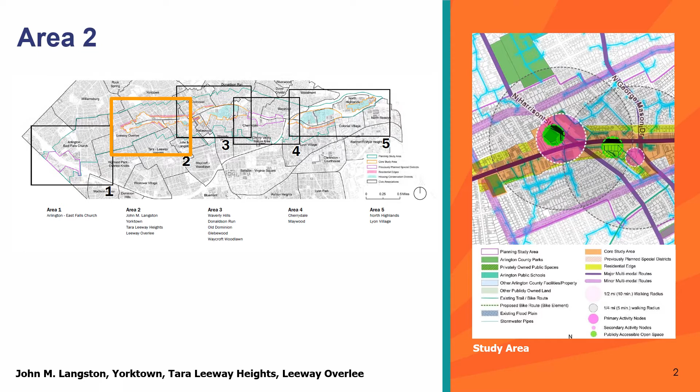Area 2 is in the western portion of the Plan Lee Highway corridor and extends roughly from Lexington Street in the west to the Langston Brown Community Center in the east.

Through our engagement with the community so far, a number of shared aspirations have been voiced regarding this portion of the Plan Lee Highway corridor.

Relative to land use, economic vitality, and housing, there's been a desire for more businesses and mixed use on the four corners of Lee Highway and North Harrison Street, along Lee Highway and on North George Mason Drive.

Density and taller buildings in these areas seem appropriate, but mid-rise, not high-rise, and only if the parking is addressed, preferably underground or within the buildings, if transit access improved, and stormwater runoff is accounted for and mitigated or reduced.

An appropriate transition in scale, height, and character are achieved, and we want to use open spaces and gradual height transitions to make that happen.

Improving the aesthetics and function of the commercial highway frontage is important as well. And there's concern over losing the Lee Center because of its services and its easy accessibility by foot.

Regarding public spaces, transportation, and urban design, there's an acknowledgement that people will still drive cars in the future, certainly in the foreseeable future, and that we'll need to manage a transition there as new mobility options emerge.

And we need to improve parking areas, both the amount and the configuration, and pedestrian access at all of the commercial centers. Regarding historic and cultural resources, we want to highlight the history, both the buildings and the stories on those sites, and the culture in neighborhoods through art.

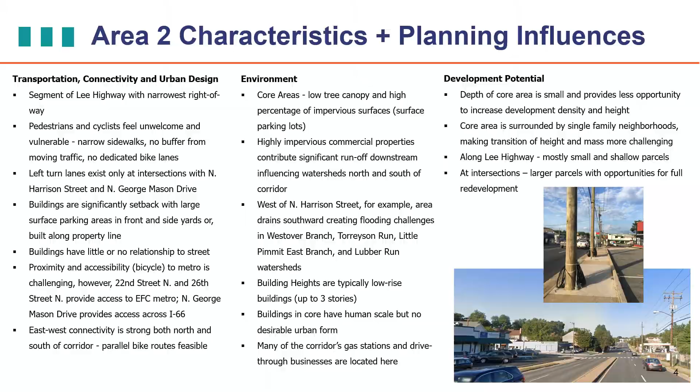Going back to the 2016 vision study can also give us inspiration for how we move forward. Keeping in mind that even with the shallow parcels, there are creative ways to develop them and still achieve mixed-use vitality at modest scale. We can also look to create new development options that are not currently available to property owners, and promote cosmetic improvements to existing structures to help tie them in with a more walkable environment in the future.

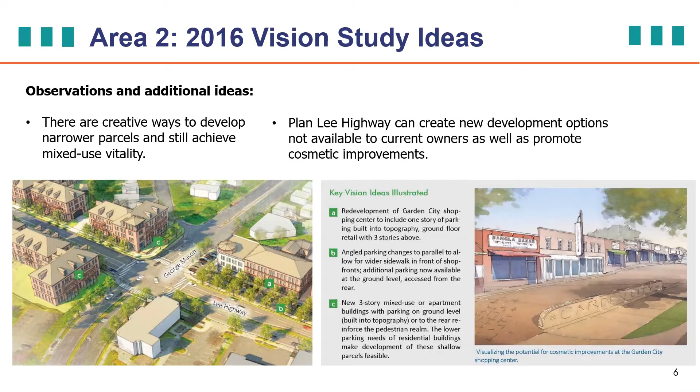So we created two different planning scenarios for Area 2. The goal is not to choose one scenario over the other, but to work with you all to examine and explore the two options, see the different opportunities and challenges they might create, and use them to help decide the best ideas at each location within Area 2, bringing them together and refining further into a concept plan for Area 2. The goal of these two scenarios is to explore different ways of meeting the key objectives.

Those objectives being to advance mixed-use development along Lee Highway, diversifying housing options including affordable housing and aging-in-place opportunities, establishing good transitions in both height and density to avoid potential impacts to surrounding neighborhoods, enhancing Lee Highway itself to accommodate wider sidewalks, safe pedestrian crosswalks, street trees, and bicycle facilities, relieving pressure at key intersections and reducing curb cuts along Lee Highway to eliminate potential vehicular, pedestrian, and bicycle conflicts as part of the Vision Zero goals for no serious injuries or fatalities in mobility settings within Arlington County, and to provide additional publicly accessible open spaces and stormwater detention and retention as integrated elements within these plans.

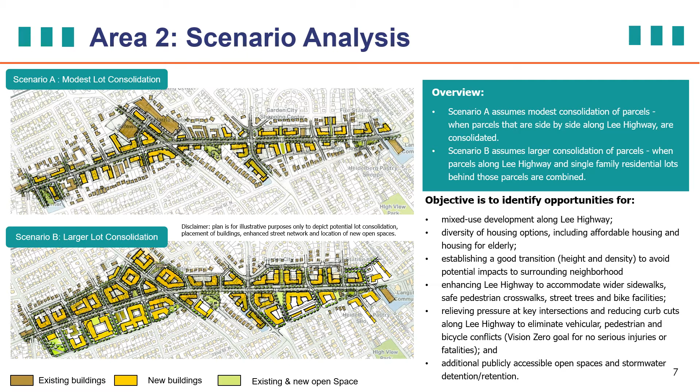We're now going to look at the two land use diagrams for each of the scenarios. These diagrams show very generalized land use ideas.

You'll also notice areas that are shown in blue. These are public properties today, part of the public facilities network, either Fire Station 8 or the Langston Brown Community Center and Secondary Program, and the Lee Community Center site.

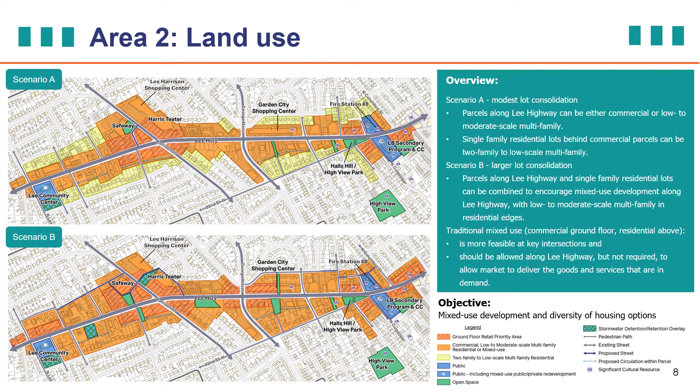It's also important to note that we want to make sure that regardless of the frontage on Lee Highway and its use, we want to have those ground floors be activated, and we want to look for creative ways to encourage employment and new services to inhabit those ground floor spaces.

Or there can be urban agriculture, which is already happening along Lee Highway. Opportunities for pet grooming and boarding facilities, co-working opportunities, and maker spaces that are places people can join and come to from around the community to gather and explore different entrepreneurial ideas or hobbies.

And there's also the opportunity to imagine how decentralized data centers will one day emerge in the market to help deliver 5G services, potentially connected and autonomous vehicles. As more and more data is generated by all of us, there's going to be a need for different models of data centers. So we want to think about how that could effectively be integrated into the ground floors and parking facilities of Lee Highway development.

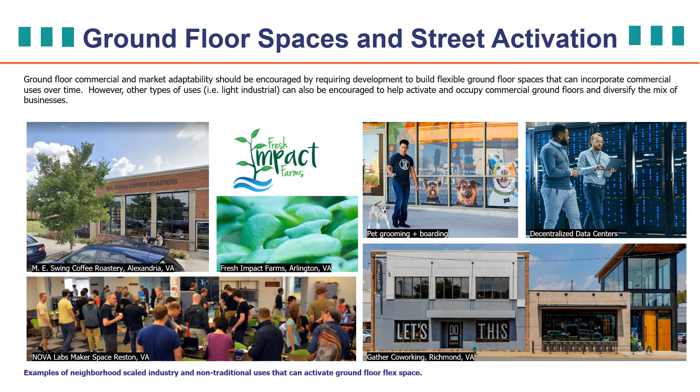There are also a number of things to think about when we compare the two different development opportunities, whether it's modest lot consolidation or more full block consolidation. They can both help achieve Plan Lee Highway goals, but they do have some differences to consider.

So we want to, in both cases, enhance Lee Highway to accommodate wider sidewalks, safer pedestrian crosswalks, street trees, and bicycle facilities. And we want to relieve pressure at those key intersections and reduce curb cuts.

It's a modest consolidation, with a drive-through bank on the ground floor and residential opportunities in a couple floors above that. So it's a hybrid, moving towards a Main Street approach, but still with a relationship to highway-oriented uses.

In scenario B, which is the next portion of the same block, the redevelopment has greater consolidation and is deeper, going to the first full block. In that case, flexibility is created by having a taller building. That consolidation is more financially viable, resulting in more accessible ground floor retail space, publicly accessible private space just down the block, more consistent streetscape, and greater opportunity for a variety of price points in residential.

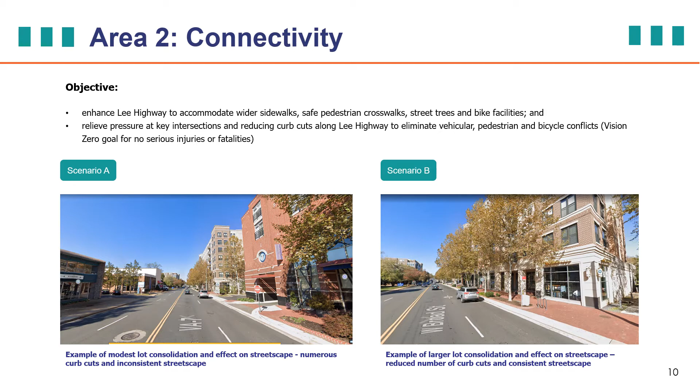There are trade-offs to think about, and both approaches help us meet our Plan Lee Highway goals. But this is just a visual comparison of what the two approaches might result in.

It's also important to imagine that along this portion of the corridor, standalone commercial development or even modest mixed-use development can still orient to the highway economy that exists today and transition from it while engaging the street better. These are examples from the region and farther south showing how those standalone commercial uses can be oriented through design standards.

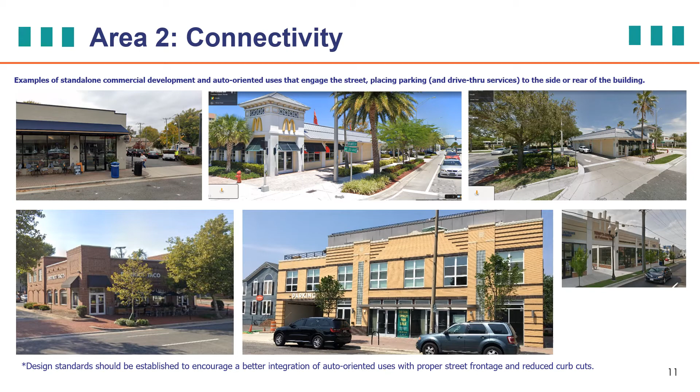We're now going to go through a series of slides that highlight the differences in connectivity proposals between the two scenarios.

Fundamentally, in scenario A, with modest lot consolidation, there would be less overall additional street grid network created. In scenario B, with a larger amount of redevelopment and consolidation of land, it would be both possible to create more connected street grid parallel to Lee Highway, and also required to best serve new development and existing neighborhoods.

It's important to note that the new streets would be small scale, one lane in each direction, neighborhood-oriented streets connecting existing communities to new destinations and streets, as well as serving the new development. We'll walk through that in greater detail in a moment.

In scenario A, there are modest opportunities to create new street grid near the intersection with Harrison Street, accessing new development near where the Safeway exists today. In scenario B, with greater lot consolidation, there are more opportunities and needs to connect streets, especially on the north side of Lee Highway, connecting existing streets with new development. We'll talk in greater detail about that in a moment.

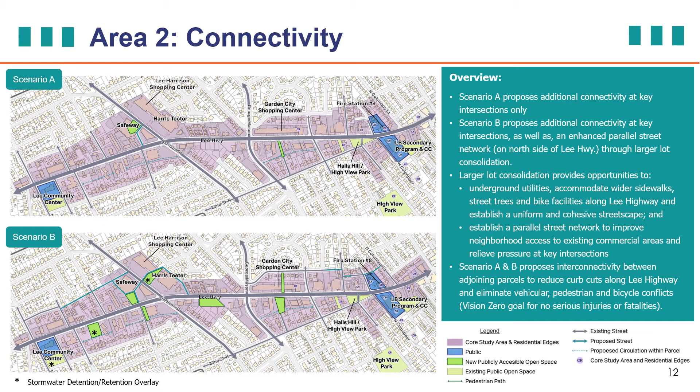The next few slides highlight a few different scenarios and zoom in to key elements. This diagram shows how near the Safeway, new roadways could connect with a new internal roadway network that provides adjacent access to neighborhoods where new mixed-use development could take place, connecting neighborhoods to the west with North Harrison Street and accessing new mixed-use development near the intersection.

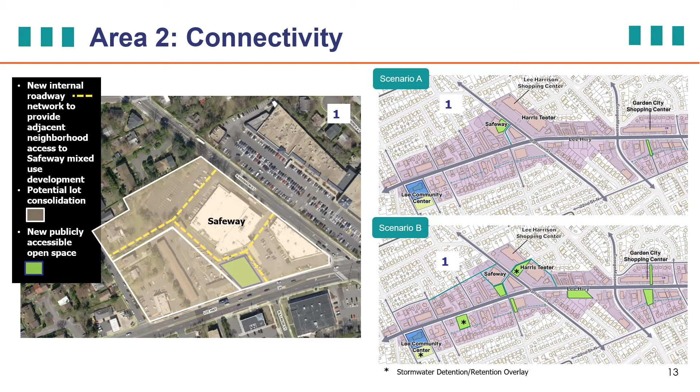Across the street, it could be possible to bring pedestrian and vehicular access to neighborhoods east of the Lee Harrison Shopping Center, connecting from Lee Highway around behind the Harris Teeter back to Harrison, accessing the new development and potentially connecting to adjoining development so people do not need to walk all the way around to get to the new amenities.

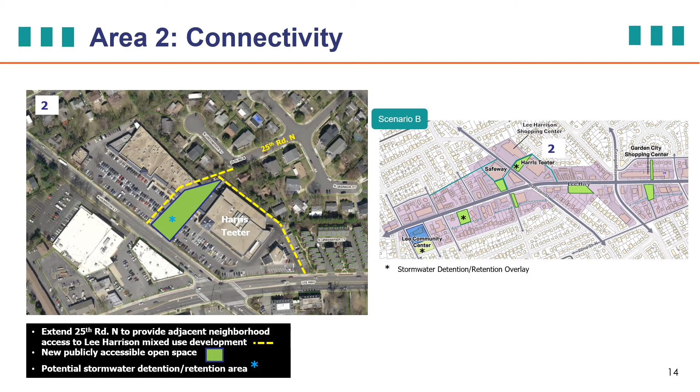Farther west, there's the opportunity to connect in scenario B, a parallel network north of Lee Highway, extending 25th Street to connect eastward to North Jefferson and eventually through the redevelopment to North Harrison Street. It's important to note that none of these changes would happen against the will of existing property owners. They would need to be part of that redevelopment by selling their property or combining it together, and the streets connected there would be done through that redevelopment by the private sector. The important benefit for the existing community is greater choice in how to move east-west without having to be on Lee Highway.

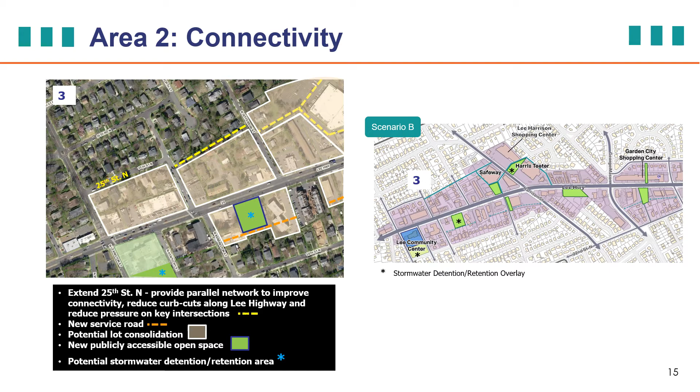In the eastern portion of the corridor, there's the opportunity to connect 23rd Road North and 22nd Road North more, connecting from Dinwiddie Street east towards the top of the hill by Columbus Street. This can also provide greater connectivity for neighborhoods north of the Garden City Shopping Center, connecting some of the cul-de-sacs near where Fire Station 8 exists today, so there's easier movement and more options for people to walk and bicycle to nearby destinations. There are also opportunities to encourage alley conditions along the southern side of Lee Highway that act as a buffer between single-family neighborhoods and future redevelopment, and to connect pedestrian corridors along North Edison Street and across Lee Highway to make the blocks more walkable, even without new street connections.

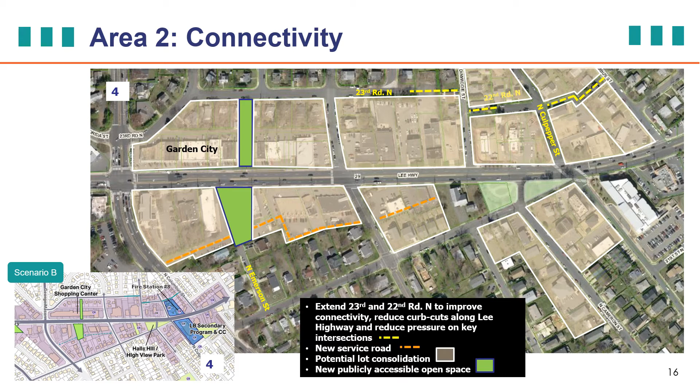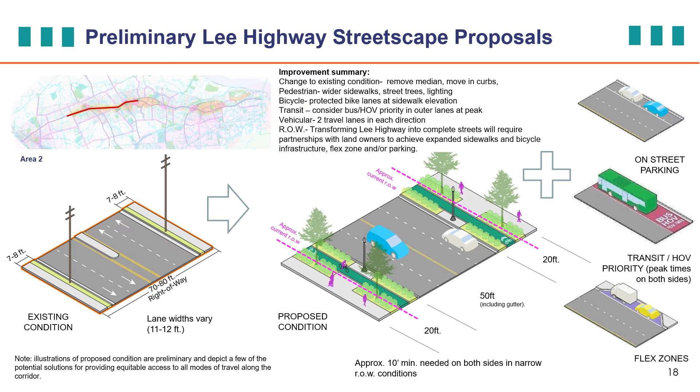We want to look at these diagrams again, but this time from the perspective of the public spaces created. With scenario A, modest lot consolidation likely means there's less ability for the private sector to provide publicly accessible private open space, because the land they have to develop is smaller, and financially there's not as much capacity to provide those amenities as a public benefit. In scenario B, with larger lot consolidation, there's the opportunity to potentially provide more of that space, and as more development takes place, there would be a greater need for it.

You'll also see overlay ideas for where stormwater detention can be incorporated in scenario B, in 3 locations: on the southern side of the Lee Community Center, at parcels just to the east, and potentially at the intersection of Harrison Street, on either development on either side. The idea is that, besides being great public space, these locations could store additional runoff below grade and detain it so it moves more slowly through the system downstream. These locations have been targeted with the help of DES to identify how they would work well with the current stormwater management system, and being close to the top of the watershed, detaining water there helps reduce downstream flood impacts.

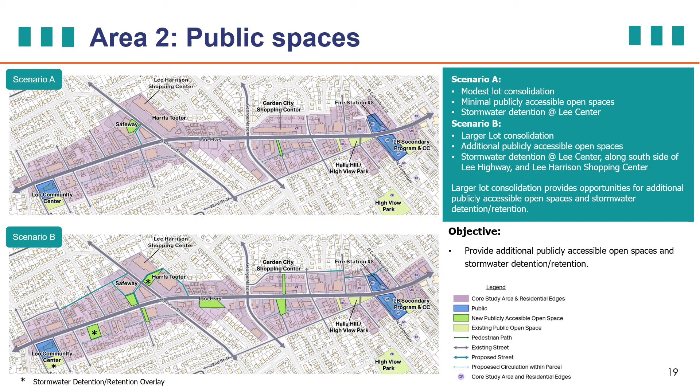Here are two examples of public open spaces that integrate stormwater management, even flood risk mitigation, with great gathering space and amenities for people. In both examples, you can see the water at the surface. It can also work to store that water in vaults below grade, so that more of the public space is usable for gatherings, amenities, and community functions.

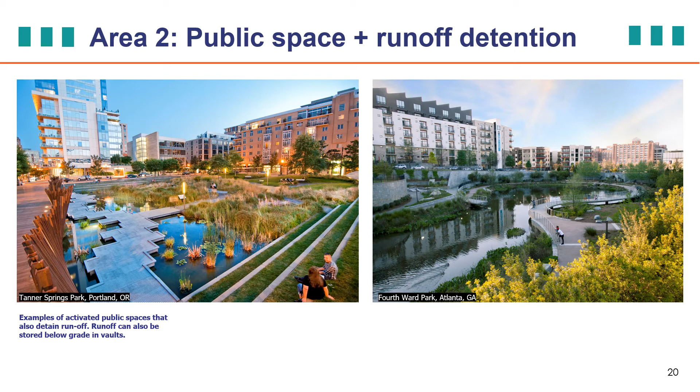We know that building heights are a critical issue to the community and a very important part of the plans for the future of Lee Highway. We want to be sensitive to the concerns, opportunities, and challenges associated with building height and density of future development. The current building height standards for by-right development vary, but for commercial, multifamily, or single or two-family zoning, they generally vary between 3 or 4 stories, 35 feet to 45 feet in height. With redevelopment, additional height for properties along Lee Highway may be needed to accommodate parking and encourage the improvements needed along Lee Highway and amenities for adjoining neighborhoods. So the proposed building height ideas shown in the next few slides are general recommendations and preliminary.

They're based on establishing good transitions and achieving desired community improvements overall. The increases in building height are a means to achieving those goals and making redevelopment economically viable. Those improvements include stormwater management upgrades, intersection improvements, street grid expansion, publicly accessible open space, and potentially greater affordability contributions. Additional consideration for historic structures and their influence on building heights will be determined in the next step and will involve community input, which may ultimately change the attitude toward height in key locations.

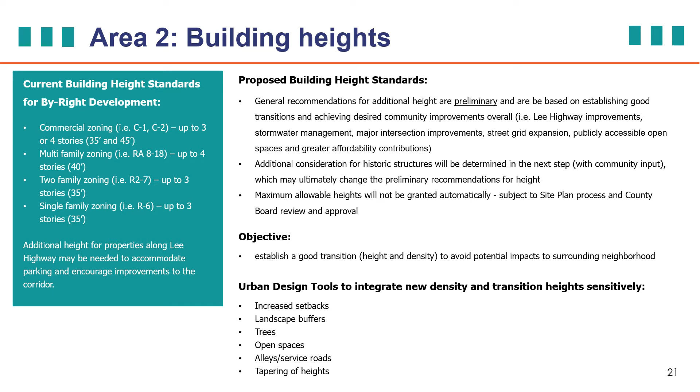The maximum allowable heights shown will not be granted automatically. They would be subject to site plan processes and county board review and approval. The overall objective is to establish good transitions in both height and density to avoid potential impacts to surrounding neighborhoods, and there are tools that can be used to integrate new density and transition heights sensitively, like increased setbacks, landscape buffers, vegetative buffers, open spaces, alleys and service roads, and tapering heights between neighborhoods.

The images here highlight a few of the typical transitions we might expect between scenario A and scenario B. In scenario A, the transitions in use and in height would likely happen along an alley halfway through the block. These are some examples from the nearby Columbia Pike corridor showing how those transitions between modestly scaled multifamily and mixed-use structures and adjoining single-family or two-family homes might happen along an alley or lot line.

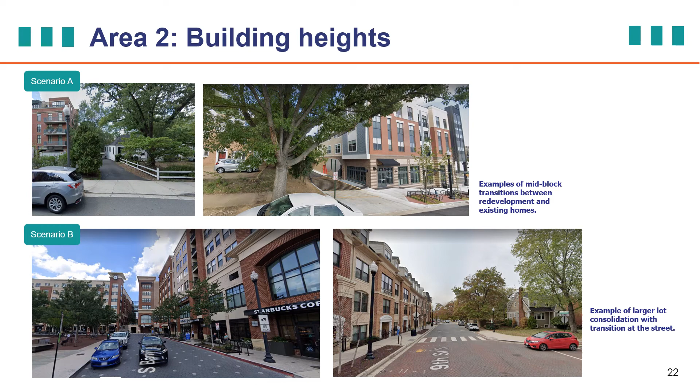In scenario B, where we have that larger consolidation footprint, you can see from Columbia Pike where there is increased height, public space, and ground floor uses engaging along where Lee Highway would be that greater height, but then stepping down to modestly scaled multifamily or townhome scale development across the street from single family homes. So these are two of the transitions that might be anticipated.

These diagrams highlight that as well. On the left, the diagram depicts scenario A, where redevelopment leads to a modestly scaled multifamily structure with ground floor retail in the corner, about half a block deep. Down the street would probably likely still remain ground floor retail in more of a strip commercial fashion that you see today. But then there would be that transition in height along an alley to the existing single family homes behind. You can see in the cross section in the lower left how that transition from Lee Highway to the single family neighborhoods might work, stepping from 5 stories in height down to 3 or so stories for single family homes.

In scenario B, we have greater consolidation of land imagined. That gives the owner more opportunity to build taller buildings that incorporate more aspects of amenitized public space, potentially greater, more consistent streetscape improvements, stormwater management upgrades, emissions reductions, green roofs. That type of thing becomes much more possible with a larger development because of the economies of scale that would be present. Also the opportunity for connections through to the existing neighborhood, but there are still opportunities to terrace the building down to provide a good transition with the adjoining single-family residential neighborhood along that street condition. So two different ways of managing the transition and incorporating differences in building height, again as a means of achieving the community benefits that are desired.

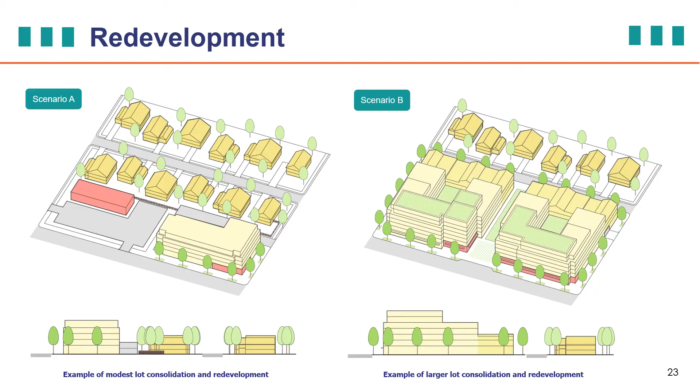The two diagrams we're looking at here highlight allowances in building height between scenario A and scenario B. In scenario A, we're proposing up to 7 stories of height along the north side of the intersection of Harrison and Lee Highway. Along Lee Highway itself would likely be up to 5 stories in building height for parcels that are redeveloping and consolidating along the highway, terracing down to up to 4 stories in height at the single family residential edges along the existing single family neighborhoods.

Scenario B, where it imagines greater lot consolidation, has the opportunity to transition differently. There we see the opportunity for up to 7 stories in building height more consistently along Lee Highway, then stepping down to 5 stories at the mid-block level, and then down to 4 stories again at the edge of the redevelopment area. It's important to note that the height allowances are also meant to help encourage the consolidation of property necessary and to provide those increased investments in stormwater management, publicly accessible open space, major intersection improvements, street grid expansion, and greater affordability contributions.

Both of these scenarios help us achieve our planned Lee Highway goals. It's possible, though, that with scenario B you'd be able to achieve those goals faster, but it does require more consolidation of property to terrace those heights down in a sensitive way.

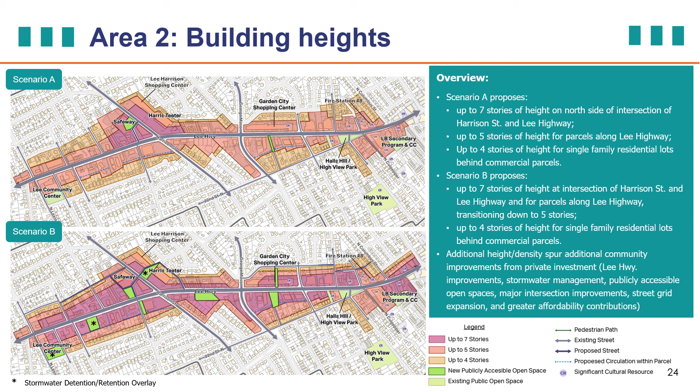As we come to the end here, there's just a summary of the fundamental major differences between scenario A and scenario B. We're not going to read through all of them again, but we're just going to place them here for you to observe and understand as you're considering the benefits, opportunities, and challenges posed in each of these scenarios.

And it's important to remember that as we move towards implementation, there are going to be trade-offs to consider. So there would be a base level of implementation that the private sector could be responsible to build, that would involve contributions to site improvements, and there would certainly be some affordability component of that as well.

But there would then be additional incentives. The goal is to have additional incentives that would potentially, in exchange for greater height or density within those limits we just discussed, help spur additional community improvements from private investment in those key locations, like investments in the Lee Highway streetscape, stormwater management, publicly accessible open spaces, and those intersection improvements, street grid expansion, and greater affordability.

It is also important to note that we do anticipate county investment in some of the larger transportation, stormwater, and infrastructure improvements that really only the public sector can do. But we want to focus those investments on what the public sector is best at doing and allow the private sector the opportunity to help achieve a majority of the benefits along the corridor.

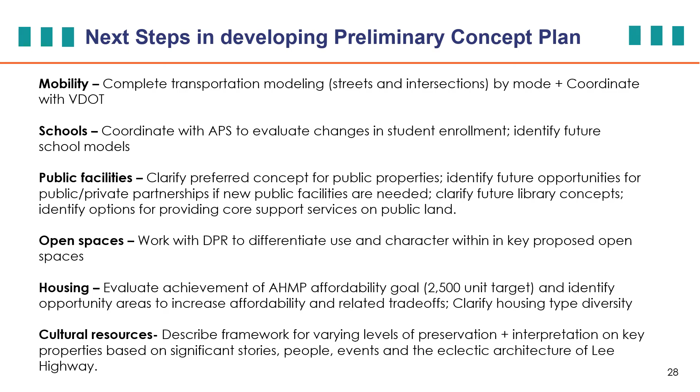Thank you very much for your attention to this presentation. More information on Area 2 and the broader corridor-wide goals for Lee Highway are available on the website. We look forward to talking to you in the future. Thank you.